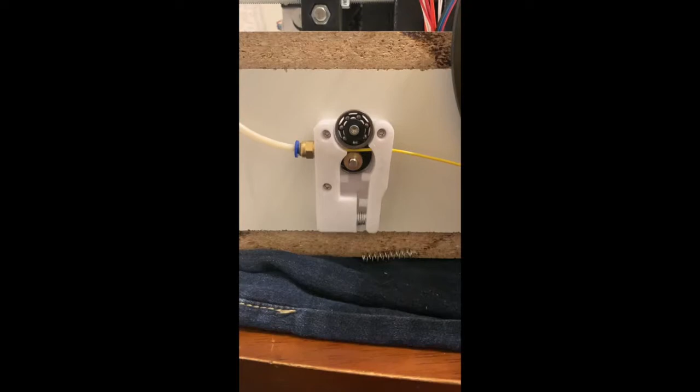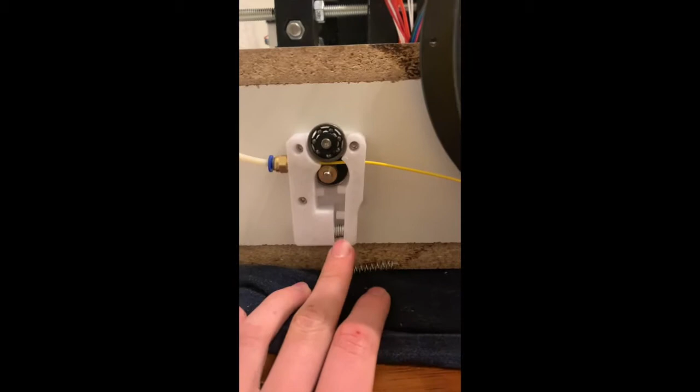Here is the second iteration of the entire extruder mechanism. As you can see, I've extended out the point where the spring is as to put more pressure on the filament. Before it was skipping, and applying more pressure seemed to fix it, if momentarily.

But then I attempted to do a benchy with this setup, and it would not retract. It would just skip all over the place. And so now I've gone ahead and designed an entirely different extruder mechanism.

But just in case, before I print that, I wanted to see if it was the hob gear I was using. This is the one that was in the extruder, and the teeth on here aren't very sharp, and so they don't dig into the filament as much as this one that I stole from my other printer.

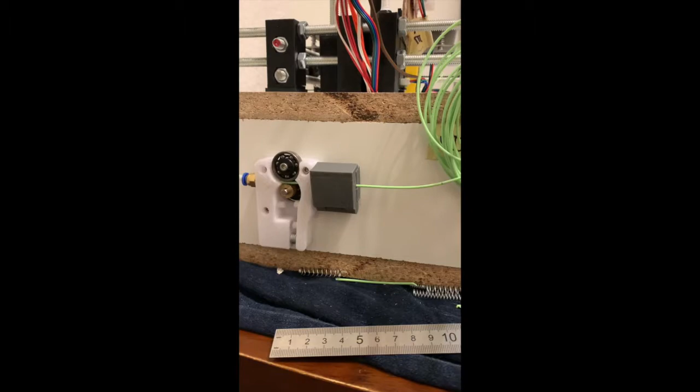I believe I found the cause of the under extrusion. At first, I thought it was because this extruder design wasn't putting enough pressure on the filament to push it through. Then I thought that the hot end wasn't smooth enough, that there was too much drag, but I go to

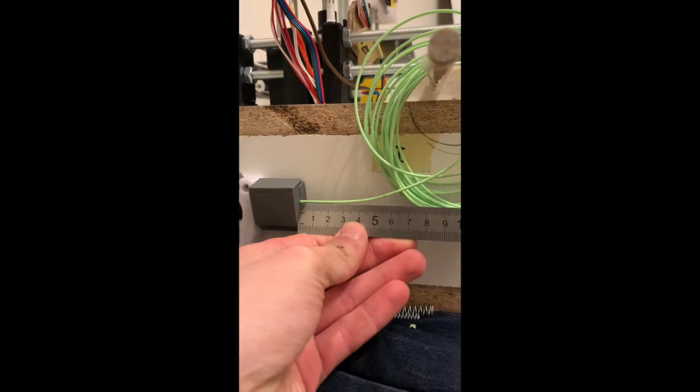check the E-steps and I extruded 100 millimeters, and this is how much is left over. That's where the mark is for the 100 millimeters, and that's where I measured from. And as you can see, it's over 50 millimeters.

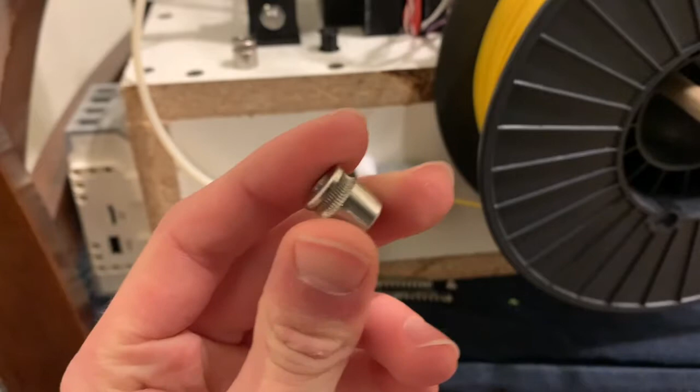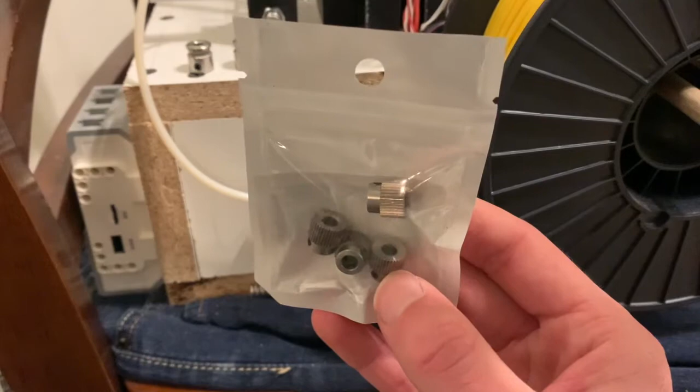I've also gone ahead and replaced the extruder gear, as it was causing me lots of problems. These hob gears, the teeth on them weren't sharp enough to actually grip the filament, and so I had to end up ordering these. Well, the title said they were steel, but they're actually aluminum, but they're just straight, they're not hobbed, and they're able to grip the filament a lot more.

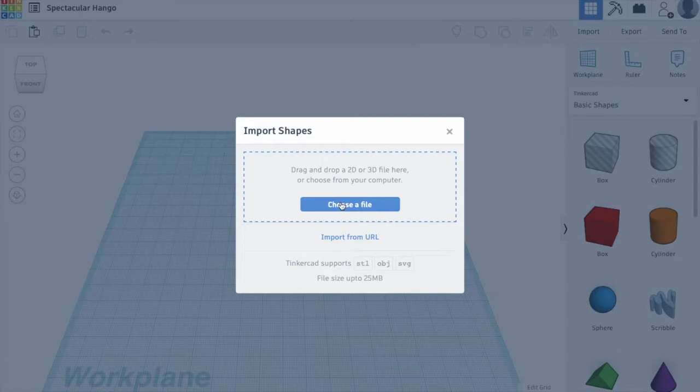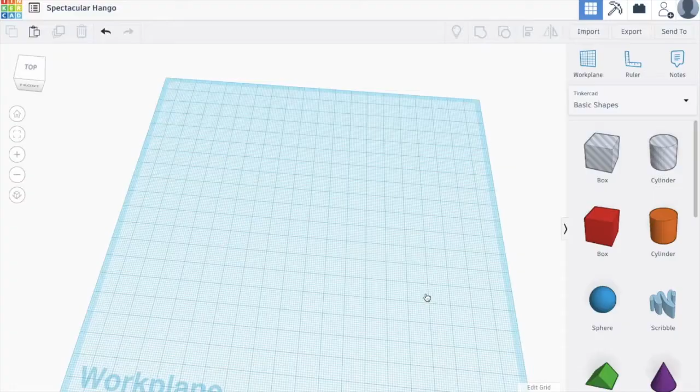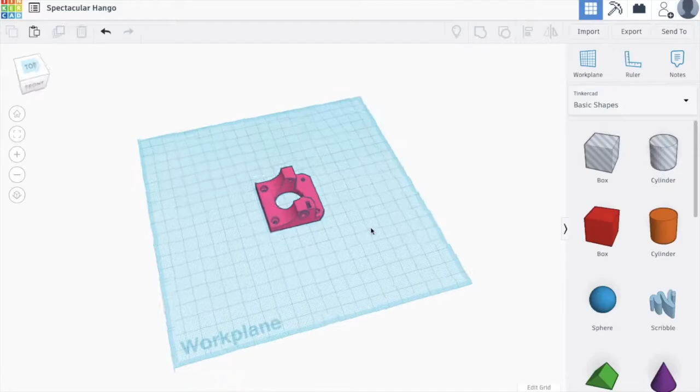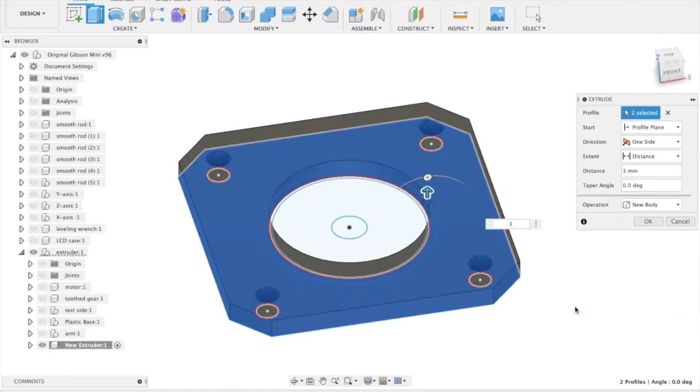And since I could not get this file to work in the end, I had to go back into my original Fusion 360 file of my original extruder mechanism and model an entire new one based off of the one that I found on Thingiverse. And that's what you just watched me do. You're watching me take measurements from the Thingiverse one and use it as inspiration for the one I'm currently CADing.